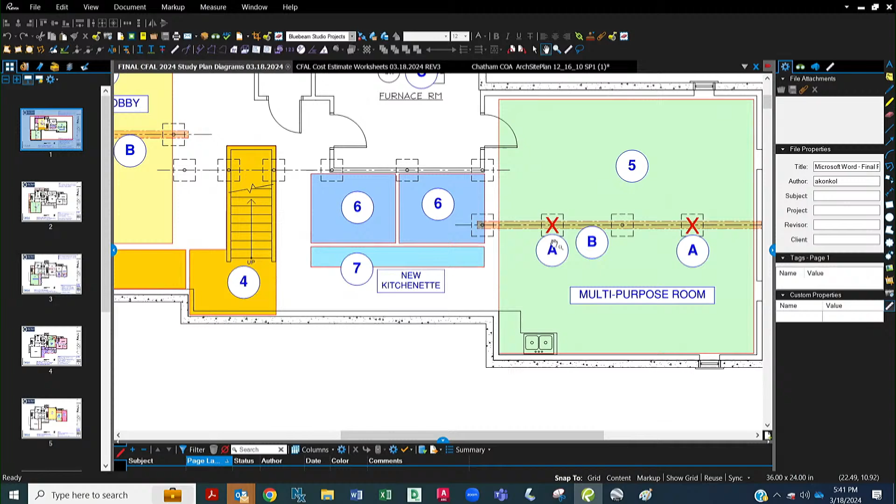Number 5 is these green areas, larger portions of the building. However, they're encumbered by steel lolly columns that break up those rooms and make them harder to use. So this plan considers the red X's as columns we'd like to remove. In some cases, we'd pull out a piece of steel and put a bigger, better piece of steel in. In some cases, we'd pull out a 4-ply of 2x10 wood beam and replace it with a steel beam. This is sort of small surgical renovation work that would make these rooms feel a lot bigger and more practical to use. Same thing at this lower left corner, a multi-purpose room that could be used as an exercise room, but there's a column right in the middle of it.

When we get upstairs, we're going to talk about the same thing.

So in the 6s here, if this floor is going to be used for public activity space, it really should have a men's and a women's restroom. We put those right adjacent to the current furnace room, which has the plumbing service and everything. So we have to cut the floor and add a lift station, because all the sewerage leaves this building above the basement floor.

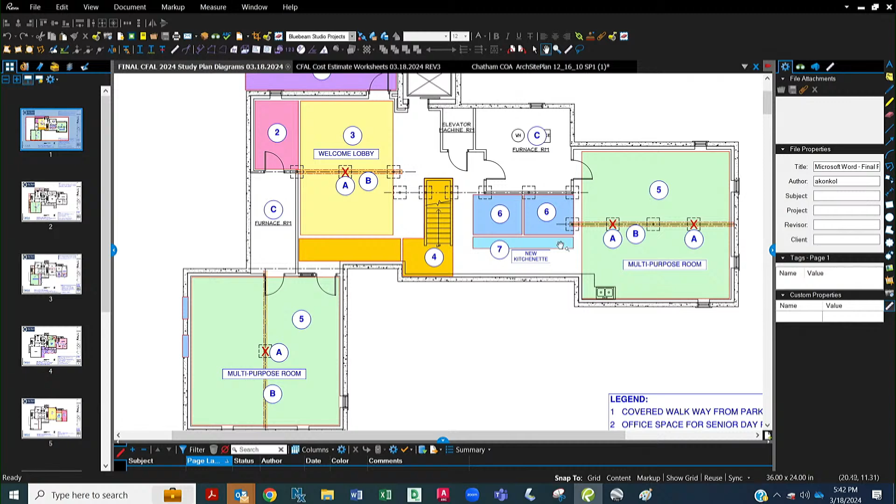We would have to put in a small lift station for these bathrooms. Finally, number 7 would be a kitchenette or buffet kind of station, with coffee, sink, refrigeration, where meals or refreshments could be served. So that's sort of how we expect we might renovate the lower level to make it a lot more usable, either for the CFAL or for the Senior Day program.

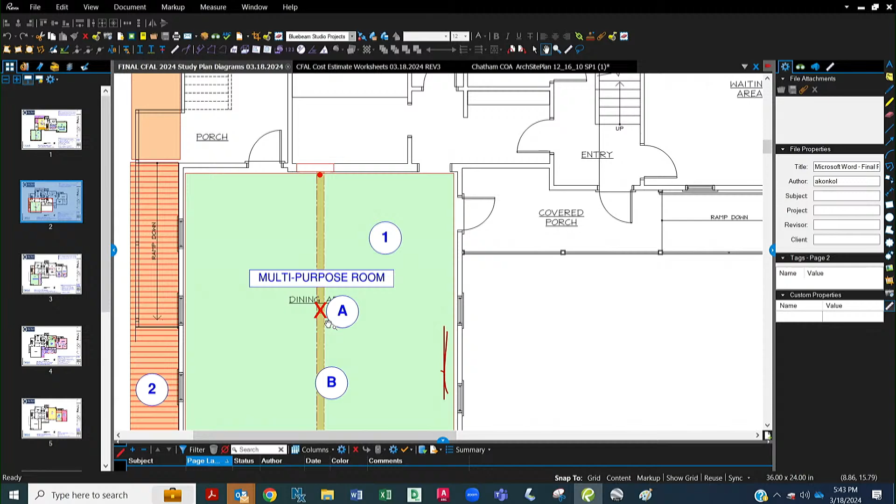Going up one story, this green block is the main multi-purpose room. Again, it's encumbered by a column that's dead center of the room, which makes it hard to lay out the tables. It's hard for people in the rear of the room to see the TV monitor. There's always somebody who's got a column in their way, like the old Boston Garden.

And then there's another issue over here on the left side of the building. There's a ramp that goes up to the deck at the back, but it's super steep. Even the able-bodied volunteers who work for Meals on Wheels find that very difficult to go up and down, especially in inclement weather. So we'd like to rebuild that ramp at a much shallower pitch, and also perhaps at the same time extend this deck.

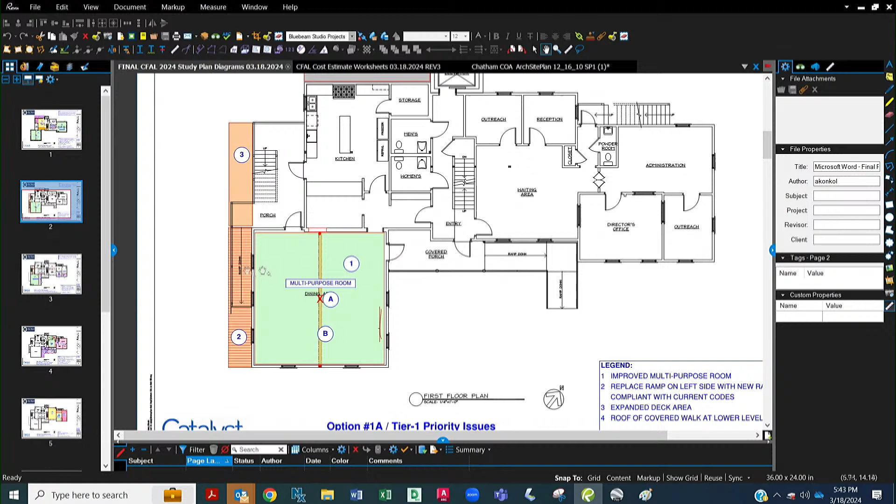So this is the lower level, and this slide here, along with the 3rd slide, which is the 2nd level, are all part of that option 1A.

Up here on the 2nd level, we were asked to look at making the multi-purpose room larger and better. Right now when you go up there, it's light and bright, but the right half of the room is encumbered by the steep slope of the Cape-style roof. So when we walked through there, we said, couldn't we put a shed dormer on this side, just like the other side?

Similarly, we were asked to look at the conference room, which has limited occupancy and limited headroom at the front wall. So we decided that if we're going to do the dormer at the conference room, let's also do it at this library office — used to be a health screening room 10 years ago, but now it's the library office. If we could do dormers there, or one big dormer, we'd get a lot more usable space, better daylight, and increased occupancy.

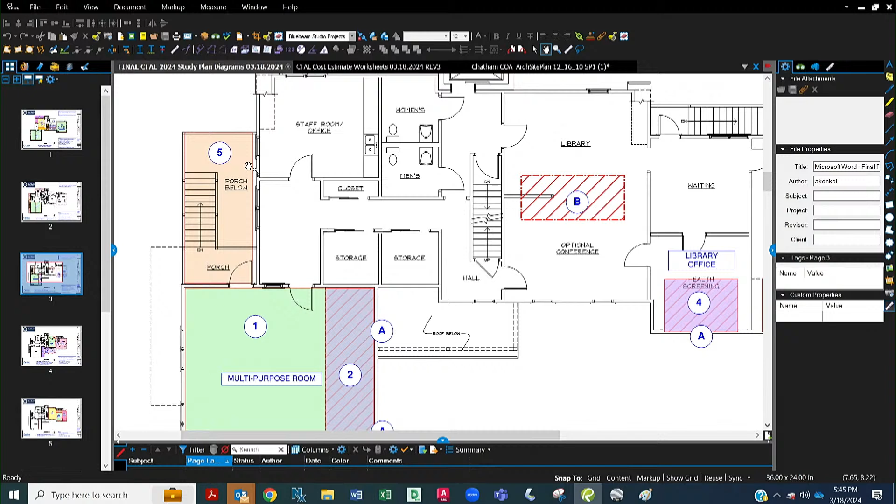The other thing we'd like to do is build a covered roof over this fire stair. New building code requires that exterior egress stairs be covered to prevent the accumulation of ice and snow, and we certainly want to remove any type of hazard we can here. So that's an important element we'd like to do in this option 1A.

In the attic story, there are actually 2 units up there, but I put this red rectangle here to indicate that all the HVAC for the second floor is up in the attic space. Terry's been working, as I mentioned, with Mass Save, Rise Engineering, and the Cape Light Compact. There are going to be specifications coming forward to replace these units, as well as the units in the basement, with all new heat pumps.

But while we're doing that, we would probably go up and do some weatherization, better insulation in the attic, maybe even insulate all the way up at the roof line, so that the equipment and ductwork in the attic is in a conditioned space.

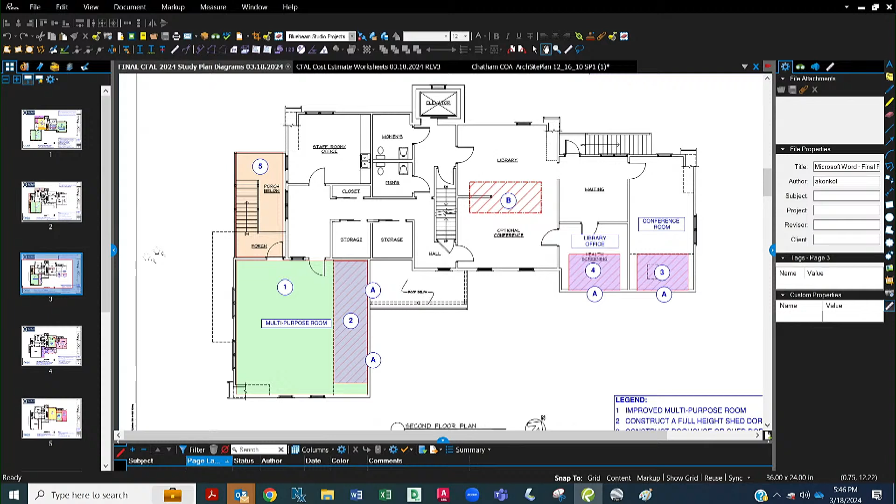So these simple things are option 1A. Turning to option 1B, this is on the first floor now. The purple area...

In order to make the multi-purpose room larger, we thought, couldn't we, in this area now that's sort of an overgrown garden, an unused entrance, stretch the multi-purpose room out another 10 feet? Remove this wall, just like we did to remove the column and put a piece of steel here, we would be adding a good-sized piece of steel on this line if we take that wall out.

But could we get this room, instead of just 30 people, stretch it to be 40 or 45 people for dining, or maybe 60 in a lecture seating scenario, to make it the biggest room in the building?

While we're adding space in the front of the building, we'd like to do an entry vestibule at the front door with a covered porch, and there'd be a small ramp area underneath that portico so that the arrival is back at the front of the building.

Currently, if everyone's been over there lately, you know the handicap access was improved at the rear of the building through this vestibule. And then from this old stair landing, there's now a sort of new enclosed vestibule there and a steel ramp that goes down to the parking lot. It was put there because it's adjacent to the handicap parking, so it made the shortest accessible route to the building, but it's not really a permanent solution in my mind.

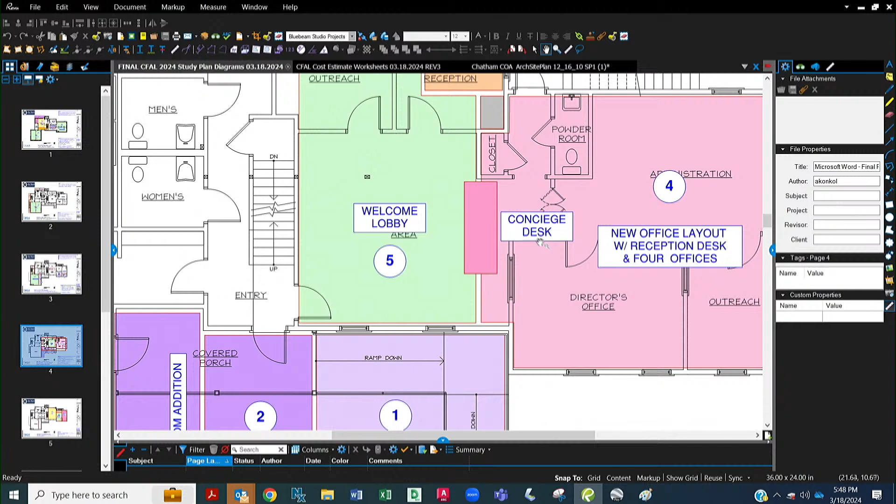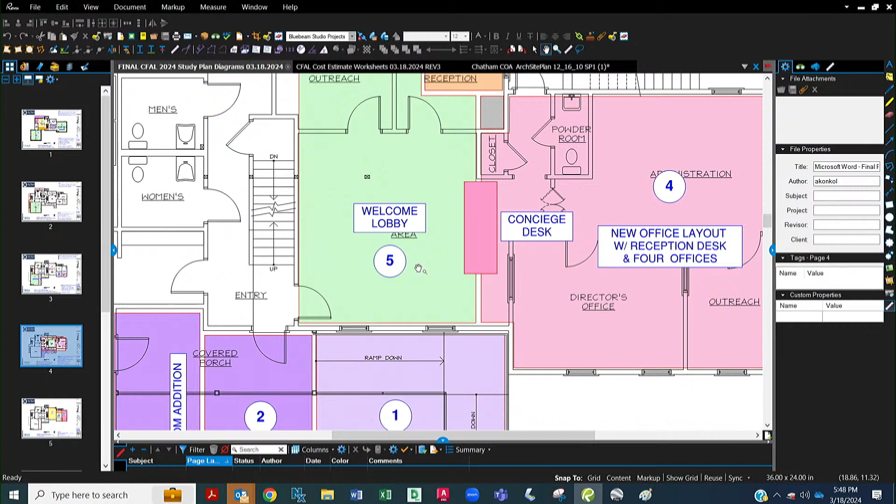The other thing was that at the center of the plan would be this sort of new welcome desk or concierge style desk, hotel style desk, where there'd sort of be a gatekeeper, where one person could see anybody come in from either entrance. And because I'm told that visitors are asked to sign in, this way we can see everything happening. So this is sort of a small addition and a big renovation as part of 1B.

On the second floor in that 1B scenario, we thought about shuffling up the layout upstairs. Right now, the library is a series of bookshelves and hallways that kind of meander through furniture. We'd like to centralize the library back into the center, and there could still be some meeting tables in the library space.

But if we were to move a couple of partitions up here, we could create a hall that gets to the enlarged conference room and then a second smaller meeting room there. So we might have a conference room that seats 14 to 16, and another one that seats maybe 8 to 10.

There could still be a meeting space in the library for those days when you have so many things going on. But these are small renovations, and this is part of the 1B scenario that we'll examine in the budgets in a moment.

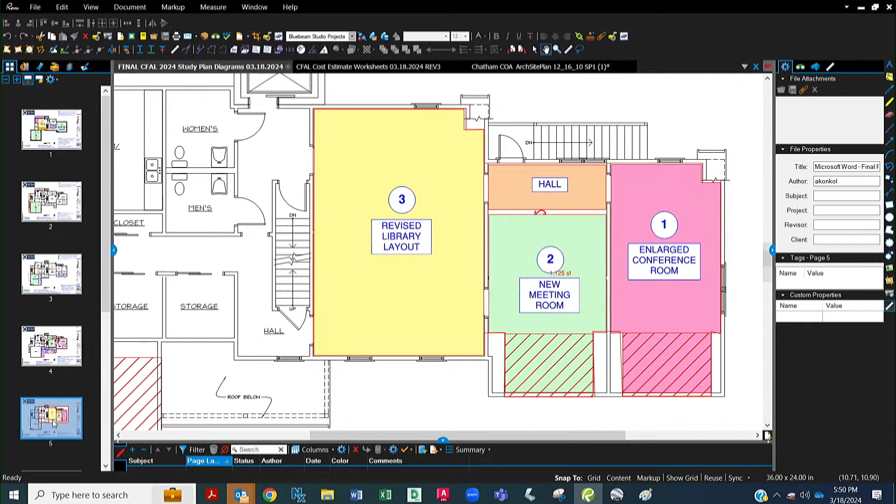Entering into what we called option 2, the team said, well, what could we do? Could we look at an addition similar to the one your firm presented in 2011 and 12 out to, I believe, the south side. And I said, sure, we could look at it.

And so this addition scenario is a little bit different in configuration. The spaces are a little bit smaller, considering how many people might attend, as this building is designed for somewhere between 6 to 10 participants in the senior day program.

And what we would do is where that steep slope parking lot on the left or south side of the building, we'd excavate there and put in a full basement. And then on the upper level or main level, we would have the senior day program.

Because we have the benefit of the hill in this basement area, we can break through the old foundation. We would have to relocate our HVAC equipment, but then we would be able to build a couple of dedicated storage spaces that Leah's staff is moving around the building when it's in their way. Those are medical equipment storage and a lending storage where somebody might need a wheelchair or a walker. Those items would be stored right here. We'd have a door right out to the lower level, and we'd still have room to go around the building.

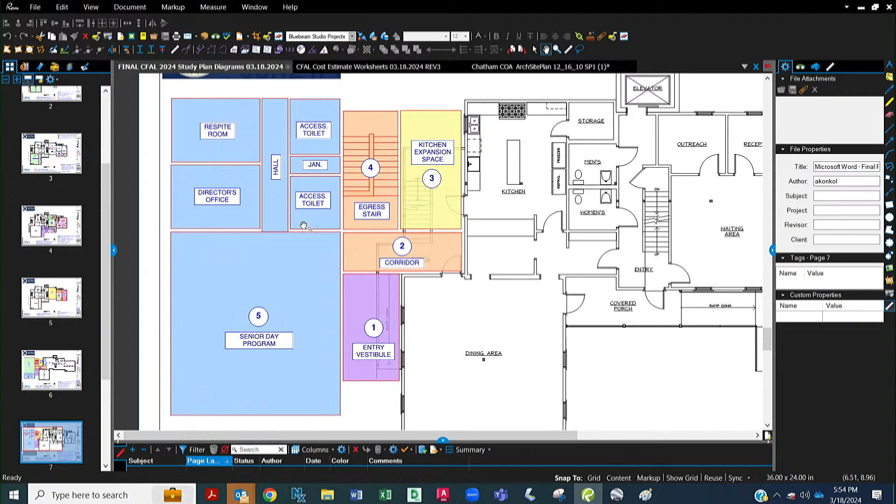A new enclosed stairwell would stretch from the basement all the way up to the second floor. This blue area is dedicated to the senior day program, envisioned as a 1-story addition above the basement below. It would have the senior day program, director's office, a respite room, corridor, accessible restrooms dedicated to this space, and some custodial space.

This is the second floor, and again, our addition would include an enclosed stairwell corridor on that level as well, and a new office space would be sort of a bonus above the kitchen space.

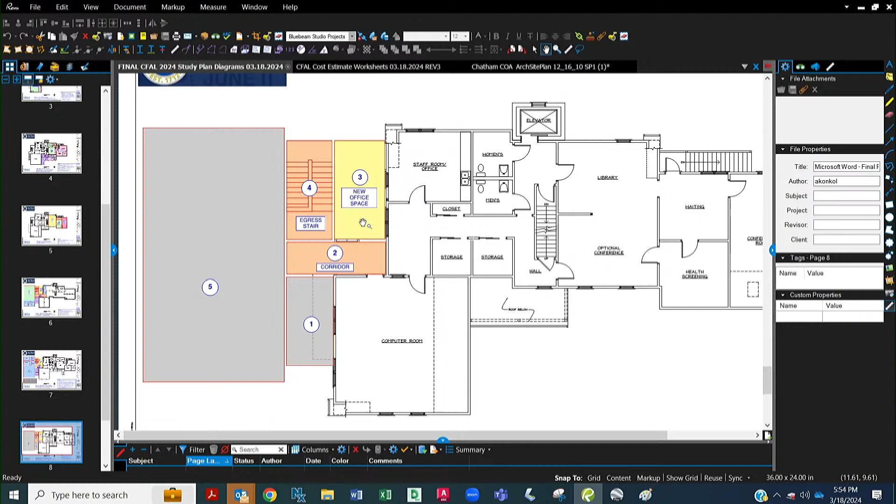So these 8 slides talk about what could be done. We've been working with some local contractors and a database of current potential building costs that we've been studying, going back and forth a couple times with Terry, looking at some other projects in town.

These are the things that we think ought to be done to the building as soon as possible: structural repairs to the foundation, HVAC upgrades throughout the building, and an updating of the elevator, which is still working today but will come to the end of its useful life. Somewhere in the next 5 to 10 years, this elevator and its machinery will be due to be replaced. So we came up with a construction cost of $530,000 for that bunch of work. Again, this doesn't stretch the building or add anything.

To this, we've added a whole bunch of modifiers as a contingency for design and construction. Our construction cost is the raw construction cost. The contract modifiers are the general contractor's overhead and profit, insurance and bond, permit fees, et cetera. All of those would probably be waived.

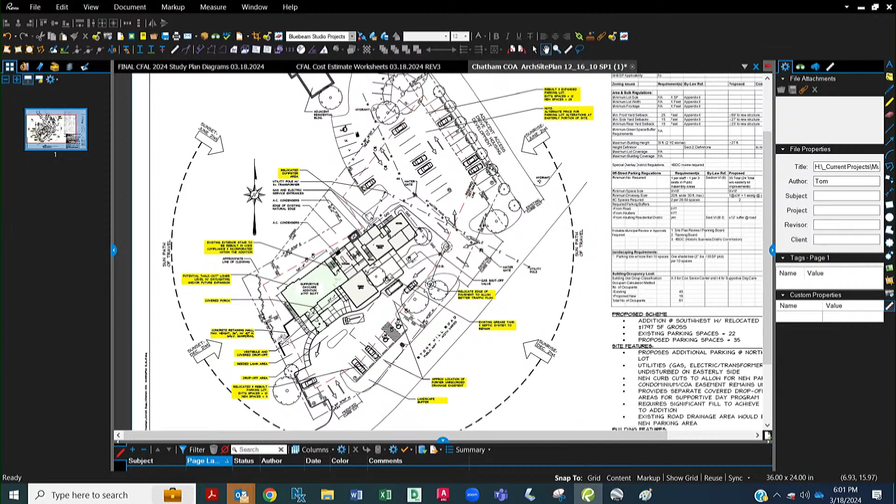Just a moment, going to touch on the site plan. This is the site plan of the existing building here in the center, in the gray highlighted area. This is the area right now, which is this new parking area that we showed.

It's now lawn, used for parking anyway, but we're considering improving the drive to the condominium association at the rear of the property, and then building some new dedicated parking on town property dedicated to the CFAL.

This green block was the shape of the slightly larger addition that my firm designed over a decade ago. We don't think the building has to go this far to the south. What we'd like to do is build it a little more rectangular in shape.

So it's in that area, and of course enclose this stair as well, so it's a little bit tighter, not quite as large. Why? Because we think it's the right size, and the price per square foot of construction now is just tremendous.

So anyway, that's the site. We can come back to that if you have questions about the site plan.

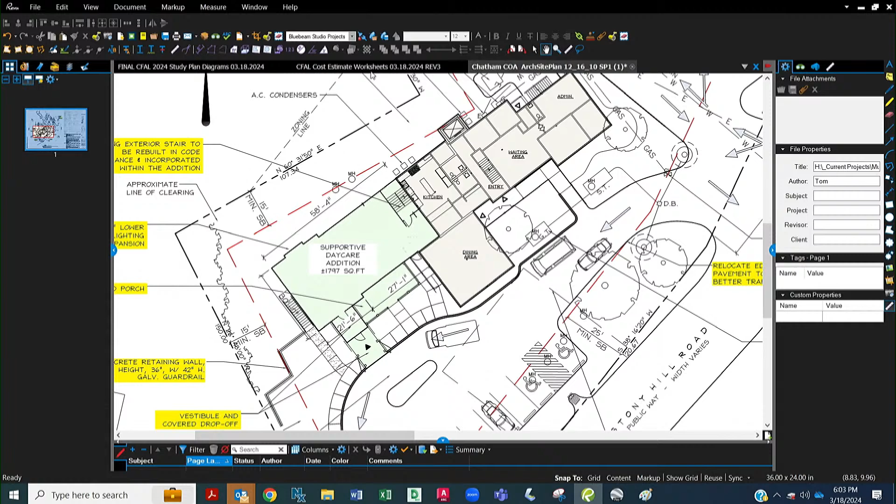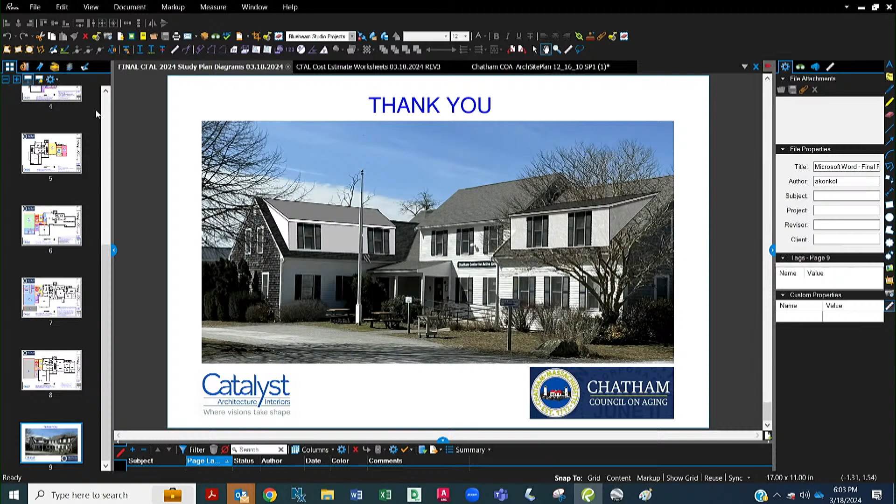But with that, I'll stop talking and take any questions.

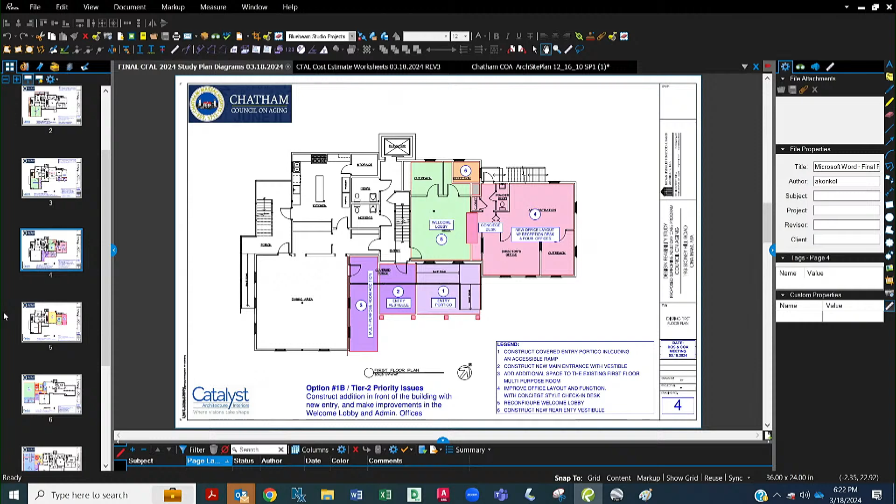Understood, thank you. My other question had to do with—I read all this late this afternoon, so I have a question on the total. Is the total, sans the base cost, of 1A, 1B, and 2, about 6.5 million? Would that be correct? So the 6.5 is sort of all-in, the base cost. And then what would the total of 1A and 1B be—3.3 million, or is that right?

Yeah, so this is sort of cumulative—each time you go down, we've left the blocks above. So it's got the base building, the second block is 1A, and then 1B is 1A, 1B, and the base improvements. And then the bottom includes supportive adult day.

But in the original plan, were we to go with 1A and 1B, we would be able to do supportive adult day health within the lower level, the way you had designed it. And we just want to assume that lower space would be, I think, 2 days a week for supportive day, and then the other 3 or 4 days a week, it could be used for any type of program. And it would give us a lot of space, it really would.

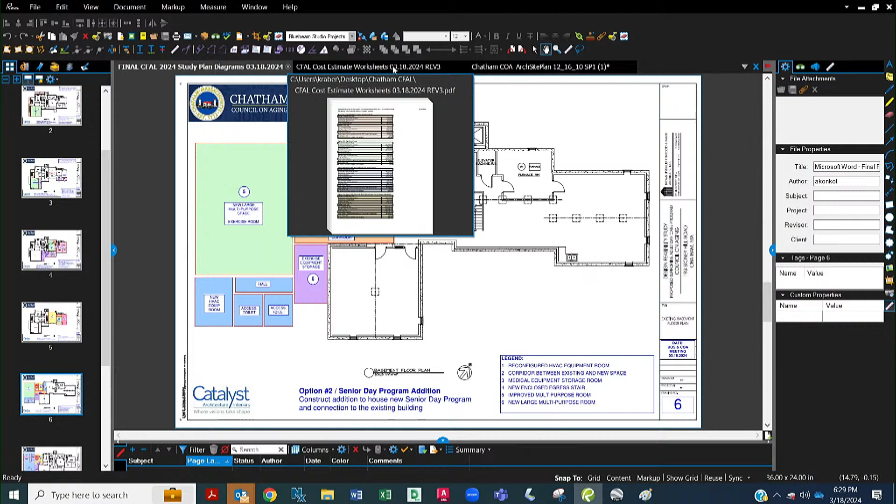Okay, I would urge that we rethink that, because those spaces are nearly unusable as they are configured today. Having those two significant spaces added to our programming options would be huge. I feel like even if nothing else were done in the whole building, at least that should be done to increase our usable space.

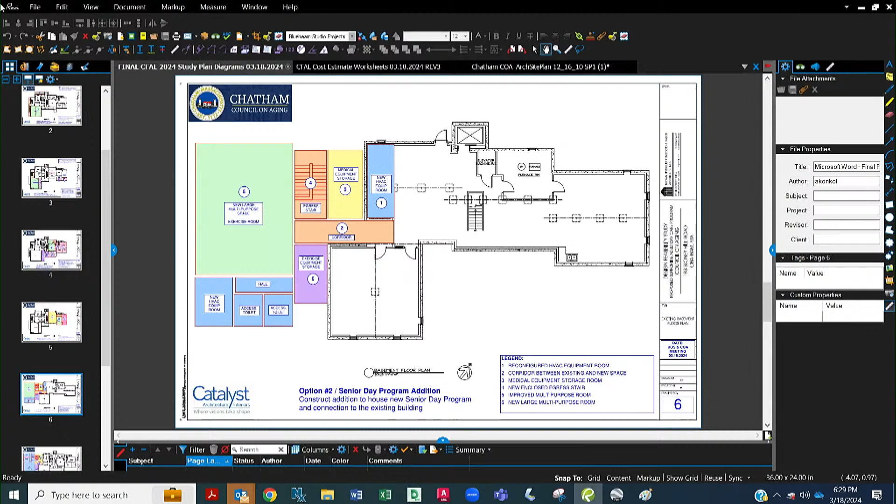Yes, I do. A key item that we've always lacked, and all of us have been to other senior centers, is a multi-purpose room, which is exactly what it says. It's not an exercise room alone, it's not a dining room alone, it's an all-purpose room. I was just wondering, you have three potential multi-purpose rooms that you've shown, and I'm just wondering what the dimensions of those are.

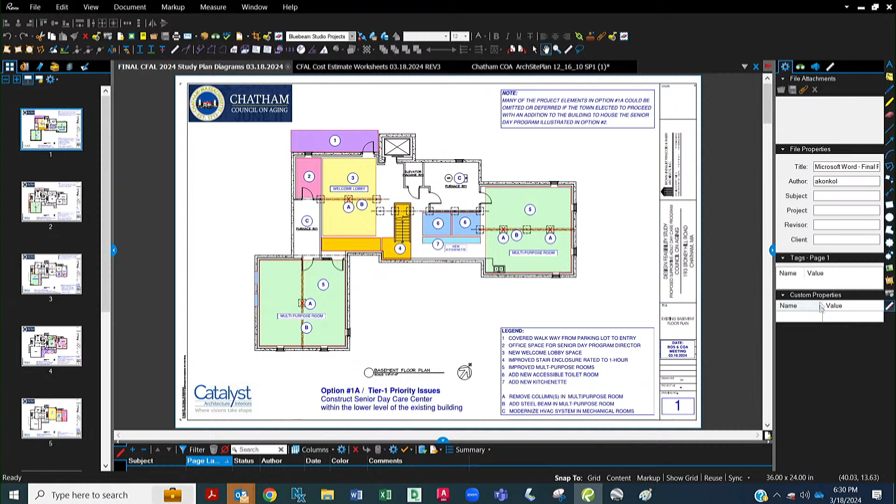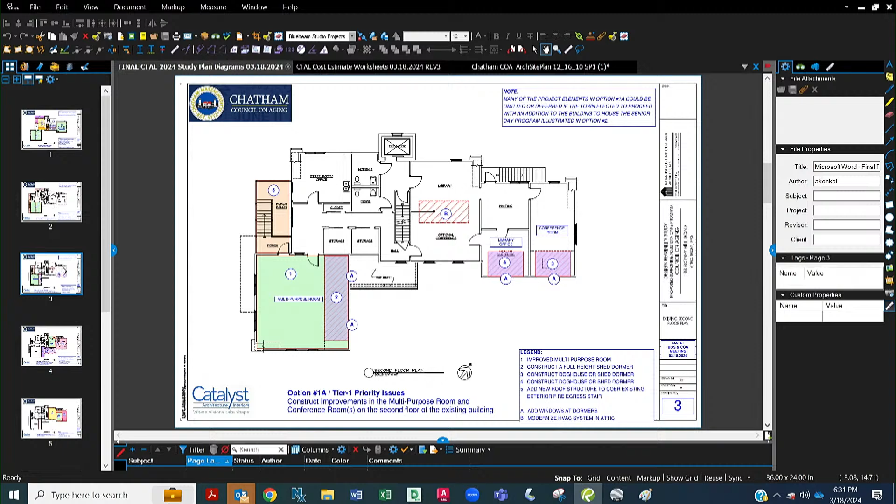And then on the upper level, again that would be the same size. So they're all about 24 or 25 feet in both dimensions. In our 1B, we considered stretching the first floor dining room by 10 feet, so that would be 35 by 25.

But the total would be, in any case, close to how much? All the rooms together? No, the total of each potential multipurpose room. There would be three at 24 by 24 feet, and in the option 1B addition, the main first floor multipurpose room would stretch and become 35 by 25.

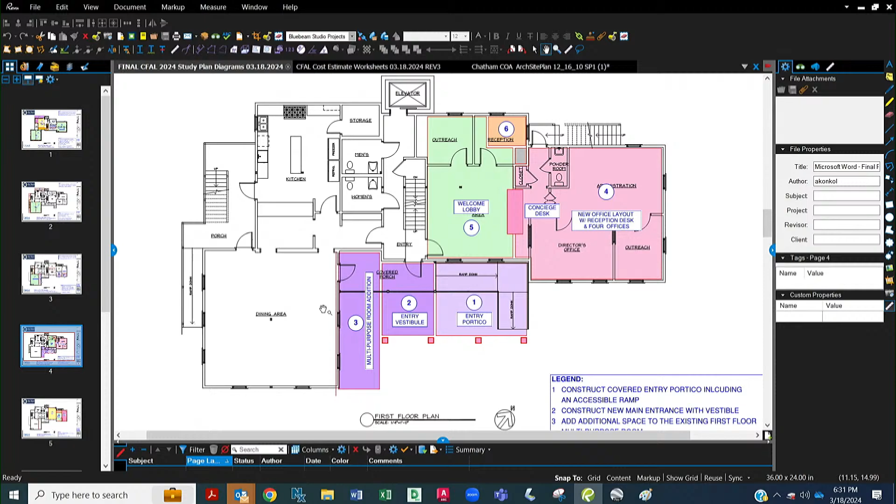Okay, because you were talking about an exercise room available. Oh, sorry, in sort of the multi-purpose room downstairs. Now, the problem is I've never seen a senior center where the meals are served on a different floor than the kitchen. So that could be an exercise room, but it wouldn't serve as a multi-purpose room. Is that my understanding?

Correct. Okay, well if you total up the maximum size, it just isn't anywhere near big enough for a multi-purpose room. Having looked at maybe 5 or 6 different senior centers, it would be totally inadequate. And since that's probably the key item we're looking at here that we've always lacked, I just wonder if there's any way to make it larger.

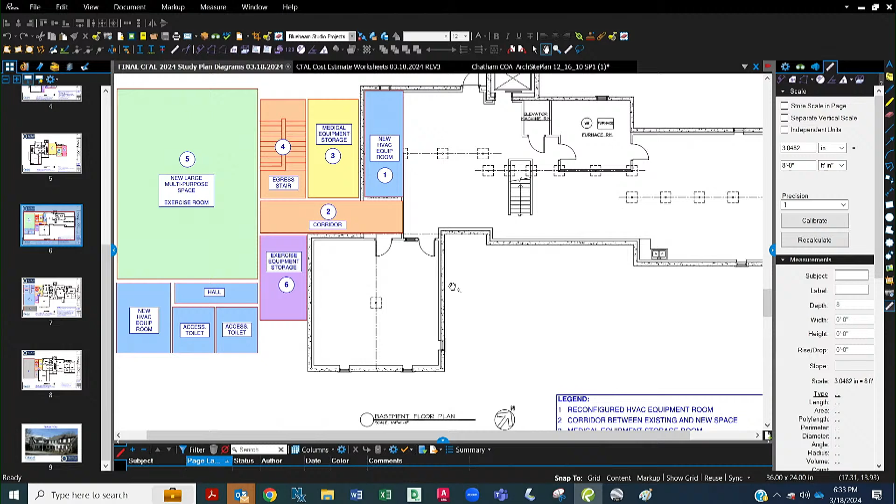It's like about a third of the size of the smallest one we've seen. I understand what you're asking, and there certainly is a way to take that first floor room and make it larger. It wasn't considered in this conceptual design or these preliminary budgets, but it could be. We could look at a bigger room on the first floor, and perhaps that means going out to the south or the left, and that would further displace the addition. But very, very feasible.

The other question is about parking. It sounds like you're going to be able to expand the parking space. What would be the maximum number of vehicles it could hold? In other words, you were using town property as well as the current space. That's also a key issue, it is a very important issue.

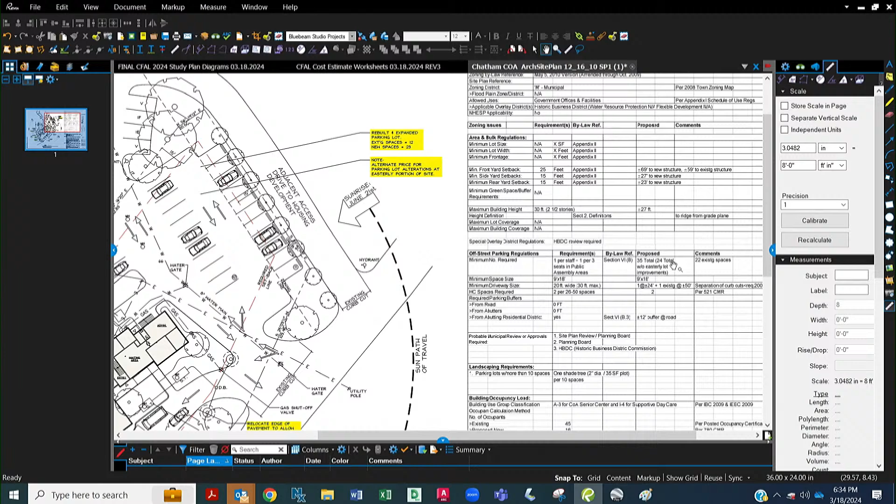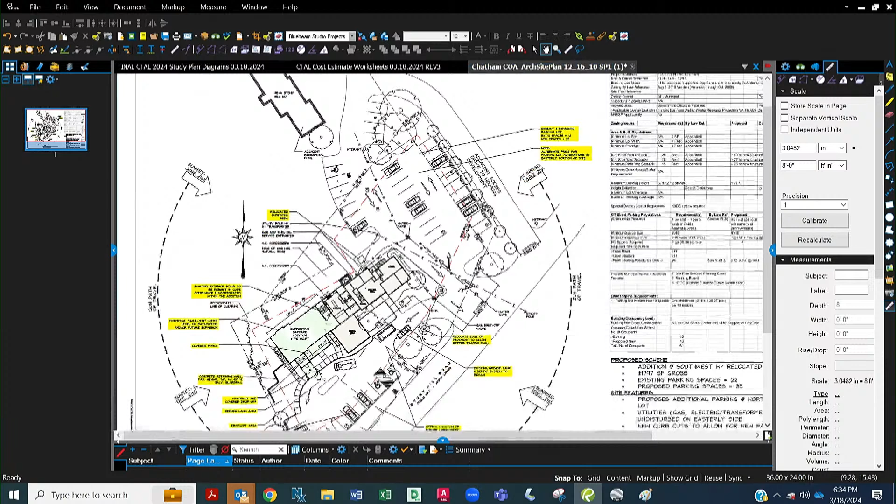Right, so do you know exactly how many spaces you have now? I think, again it's formal versus non-formal, but I think the net on that was 35 spaces. So our plan from a decade ago considered a plan with 35 spaces dedicated right in that table to the C.O.A. It's a little bit of a hybrid because some of the spaces in that parking lot actually are deeded to the association next door. But we could definitely get 35, and I think there's less than 20 now. I think it's 19 marked.

19 today, 35 tomorrow. Okay, marked spaces. Again, just speaking to everybody, that's a key issue. We were told that even at 1610, with room for 57 spaces, that could be inadequate under certain circumstances. It's just another issue that if we were going to spend all this money, we'd certainly like to accommodate a good number of vehicles that were absolutely needed. It doesn't sound like it's really possible.

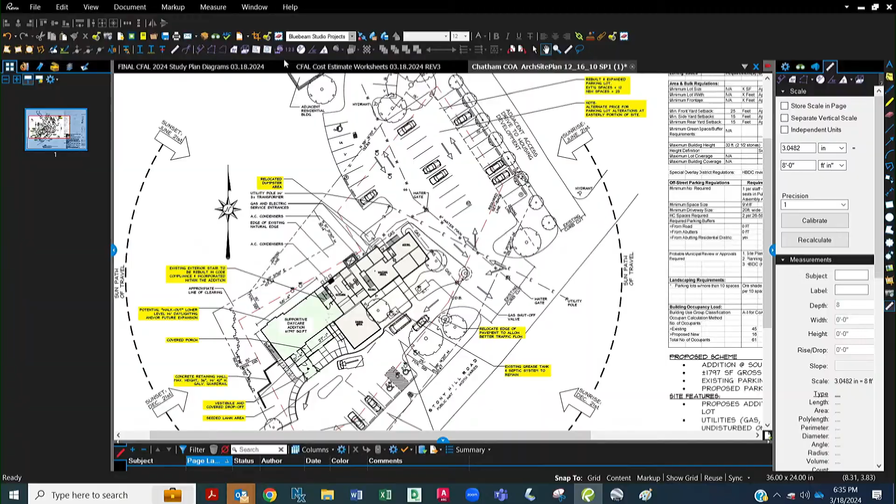It would be hard here. Hold on, Jeff, I had a follow-up question in a sec. I think for the parking, I think we are limited. I think that's a very safe position to take, that we have some limitation on parking. Sure, okay. Thank you very much.

Jeff, you had a follow-up question? I just wanted to reaffirm Nancy Field's comment about the columns in the basement on plan, option 2. They really got to come down. The beams got to go in there and make that space usable as functional space. It's not wasted space, but it's dysfunctional space at present. So I would suggest that those lolly columns are going to come down and the steel beams got to go in. Thanks.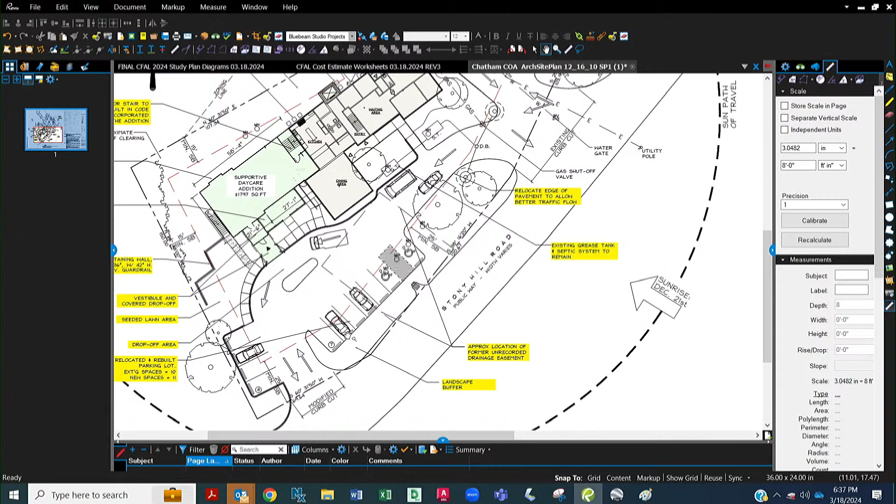Pat? One question, Kurt. When you're talking about parking spaces, are you talking about all the parking spaces if I'm looking at the front of the building to the right? Would we lose the parking spaces that we have on the left that not many people park in, but we have some? The addition would displace those. But if we didn't have the addition? Well, in this design that we came up with, we totally reconfigured the driveway. We put some new spaces in the front yard facing back towards the street so that there was a drop-off loop. That's still feasible.